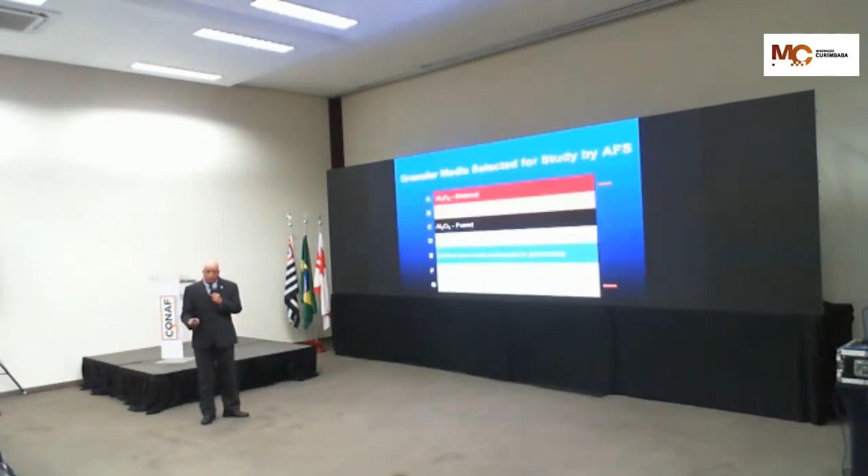I will start by showing you some data relative to funded research programs by the AFS that started prior to the pandemic period. The granular media studied by the AFS are listed here A through G. A would be an example of a granular media that was sintered, and so too is B, neither of which is CastBall. None of the materials C, D, E are Castballs either - these materials are either natural or fused. A natural bauxite material was studied by the AFS, and one of their workhorse silica sands was used as the control in the experiment.

Here we are showing you the composition of these materials, the sintered materials. The main point I want to make here is these would be medium to low corundum producing materials as a compound, and the others have relatively low levels. The other descriptions, chemically and physically, for the sands are depicted on the screen. I am going to point out some of the pertinent facts.

The AFS tried to maintain an AFS grain fineness number around 50 to 60 for comparative analysis. Some of the natural materials we couldn't get within those ranges, but this is what an AFS steering committee of experts required us to use at Western Michigan University in our studies.

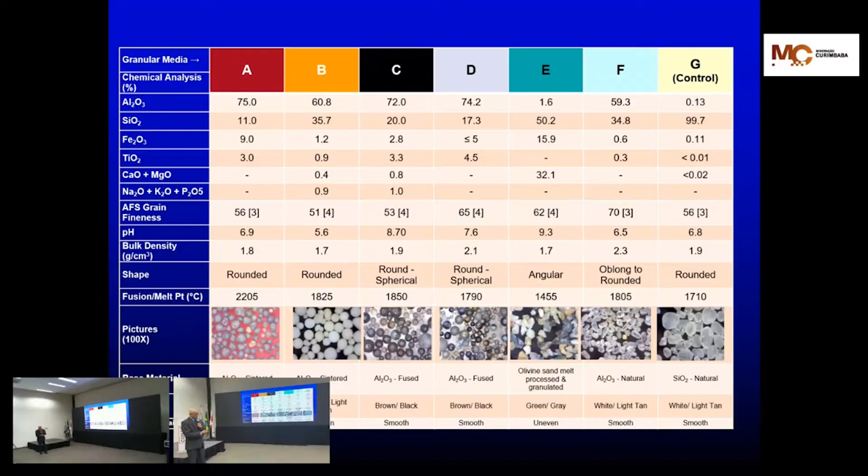Here we are showing you the pH values on the system relative to neutral, and then bulk densities of the aggregates, the shapes which are also pictured under 100 times magnification. Those are the important facts about the materials that were studied previously. Again, Castballs was not considered at that time for this study.

So a new AFS casting surface quality standard was needed. Why I'm saying this is because when we measure the grain fineness at AFS, that just gives us the average particle size. The number of screens is a distribution in foundry work that continuously changes as the sand is depreciated and predominantly gets finer. But when that sand gets finer and finer, it ultimately increases surface area, and surface area, in my opinion, is a major factor driving strength.

But strength is only one property of a granular material that we need in metal casting. What is metal casting? It's more than mechanics - it's thermal, it's chemical, it's physical. In some cases it is even more. When the metal touches that sand mold or wall, the reactions are thermochemical, thermomechanical, thermophysical. For these reasons, we needed to study surface area as well as new technologies that could get us the related properties in the sand.

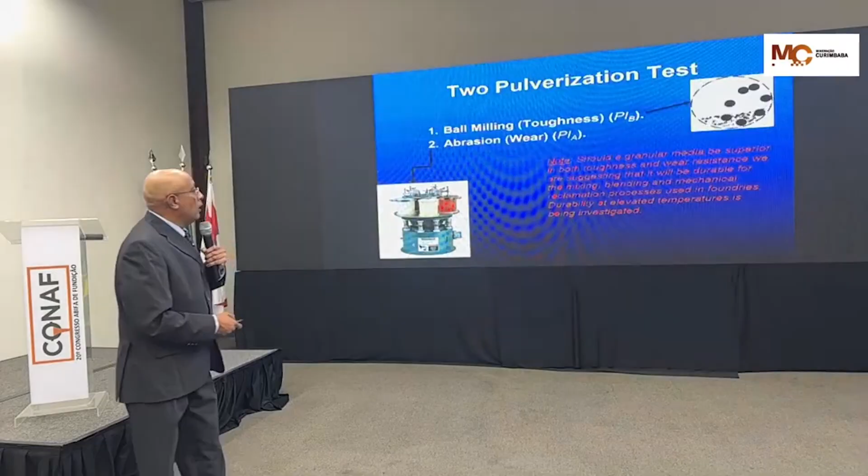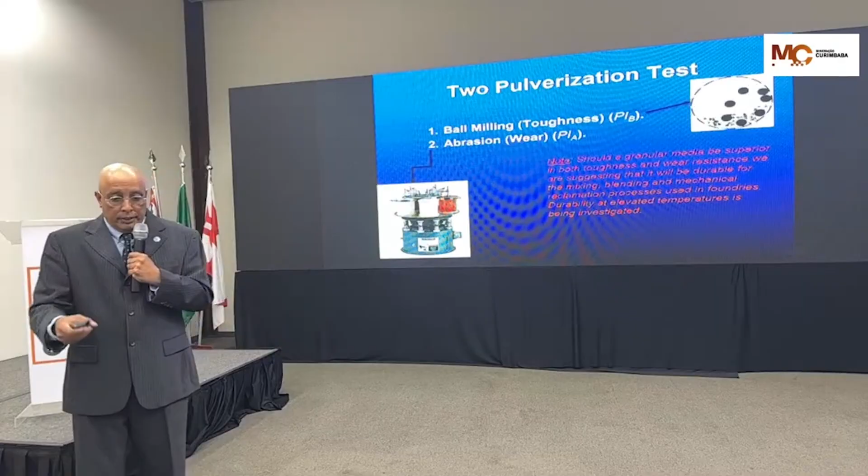So when we study materials, we have developed at the AFS a pulverizing as well as an abrasive wear test for foundry sands. These particular tests are run at ambient temperatures or room temperatures as well as the elevated temperature test. In the case of this presentation, most of what I will relate to is cast iron temperatures. So we would test these materials.

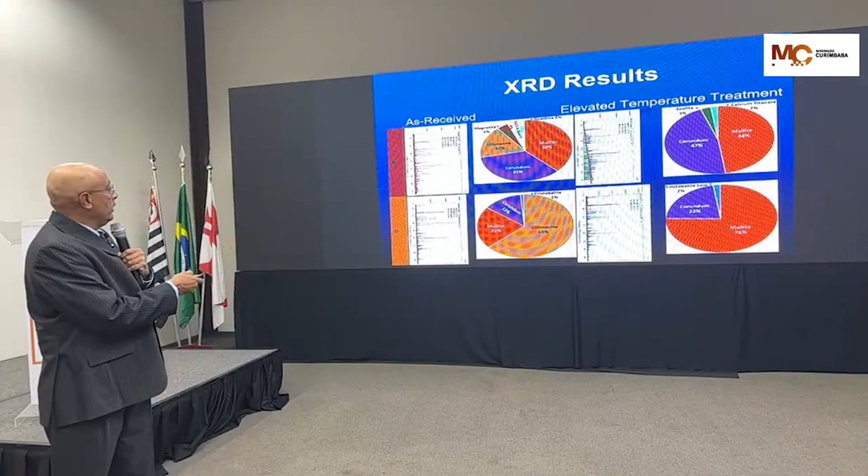In impact and abrasion, furthermore, we have studied the changes in these ceramic sands. For example, on this slide, I'm showing you one of the sintered sands that I pointed out before compared to another sintered sand. Again, when we look at ambient results from XRD, we see the level of corundum is still reasonably low. It increases or changes after elevated temperature testing.

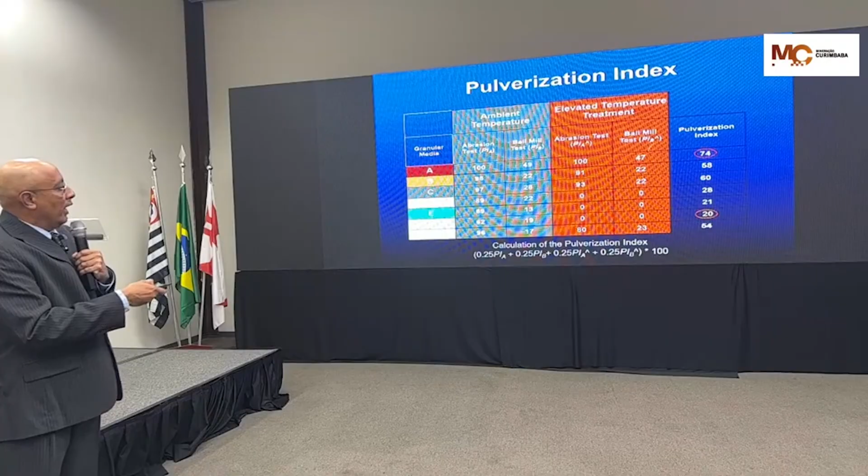Still, these levels, even after reclamation, thermal reclamation, cannot increase significantly. This is just some data relative to the pulverizing index that we run at room temperature and elevated temperature. As you see, the materials with the higher levels of corundum perform better. The higher the number in pulverization index means less breakdown in impact and wear. But what if we have a sand that was not a part of that AFS study that contains even higher levels of corundum?

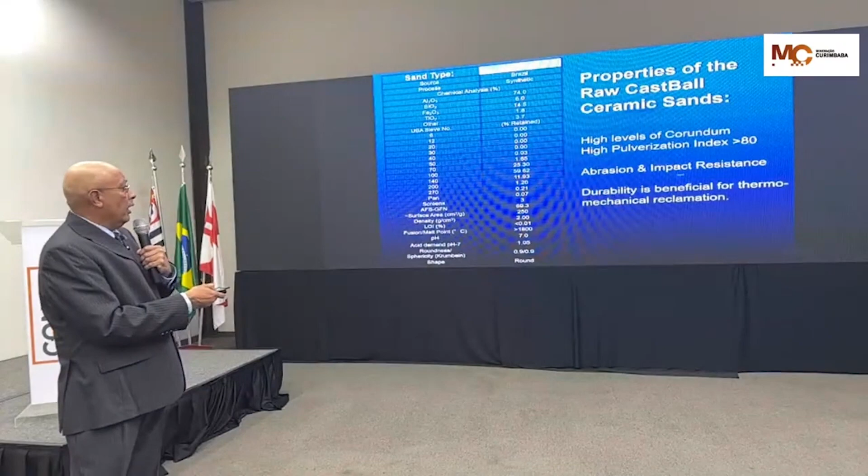Okay, so this particular slide shows where I'll be taking my discussion further. Relative to our work, I am looking at a sand made right here in Brazil, CastBall. The chemical composition that will indicate a material of much higher levels of corundum. I've indicated our measurements indicated greater than 80%. This material is more abrasion and impact resistant, and the durability is beneficial to the thermomechanical reclamation of such.

For our studies, we looked primarily at an average grain fineness number, about 70, and it shows the surface area, the bulk density, the fusion levels, the neutral pH, and the sphericity and roundness that are very high for this sand that we will compare to the same silica sand that I showed you previously.

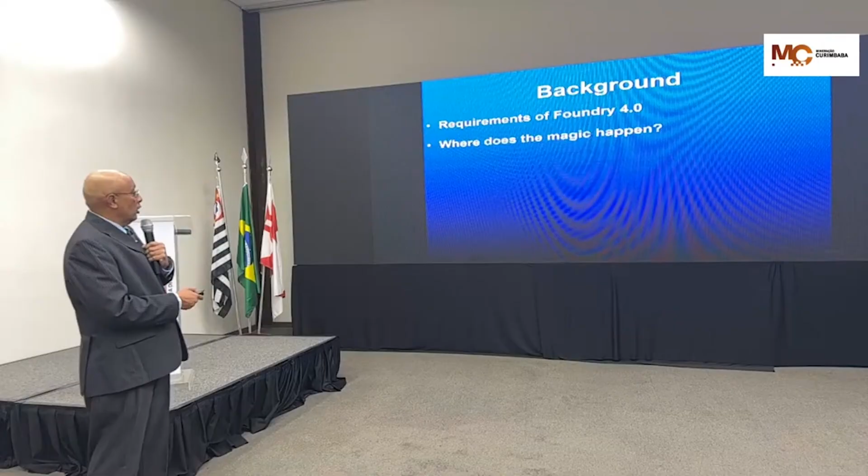So, some background. The requirements for these precision sand systems for chemically bonded sands, and I'll mention their names right now: certainly the 3D printing technologies for additive manufacturing, and then the more conventional systems, the hot box systems such as Shell, the cold box systems, the urethane-based systems, and the no-bake systems, typically for our larger chemically bonded sand casting processes. Okay? But they today are running in some cases without the touch of human hands. But where does the magic in the casting process happen?

For us at the AFS, we have a research committee called the MMIR, which stands for the Mold Metal Reactions Interfacial Committee, and I serve on that committee as a researcher.

And I'm here to tell you, we have seen even fine, smooth grain finishes with deleterious or rough surfaces bearing defects such as veins and penetrations that we literally have to spend a lot of money and time, time is money, in the finishing room to remove. So we have to study where that magic happens.

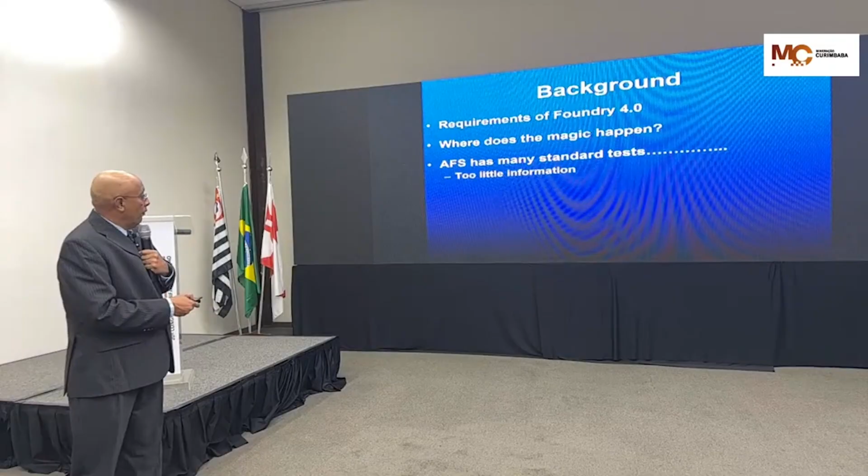The AFS has many tests currently on the books, but only a few of them are for chemically bonded sand systems. So we get very little information from the chemically bonded sand standards. A performance predicting measure for precision sand systems is needed. That performance predicting measure is something that I will be describing today. It's a casting trial based on the properties of the chemically bonded sands that we get from the laboratory.

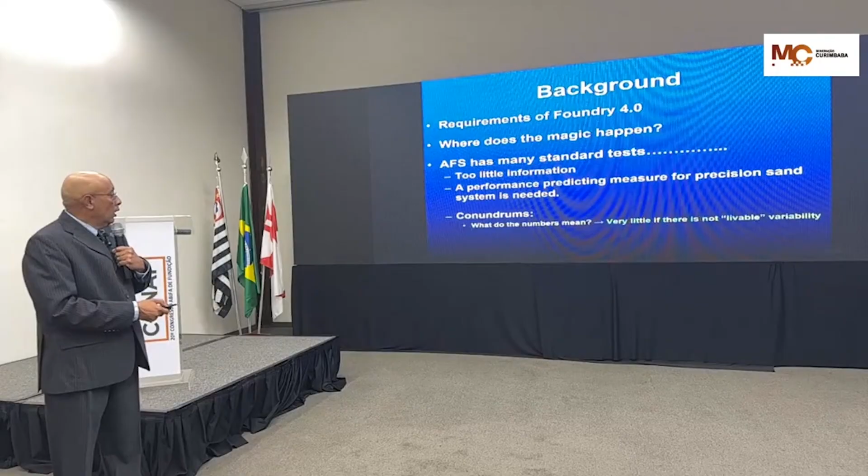What are the conundrums? What are the confusions then that we get with chemically bonded sand processing? What do the numbers mean? It means very little if there is not livable variability. Livable variability is relative, but it still has to be low.

The variability must come only from the process. It cannot come from the sample, it cannot come from time, and it cannot come from our testing. The variability that we have to measure against quality is the variability of our process. And that we have to determine ourselves within the foundry in terms of what is livable for us. Livable means what my customer is willing to accept. That's what it means.

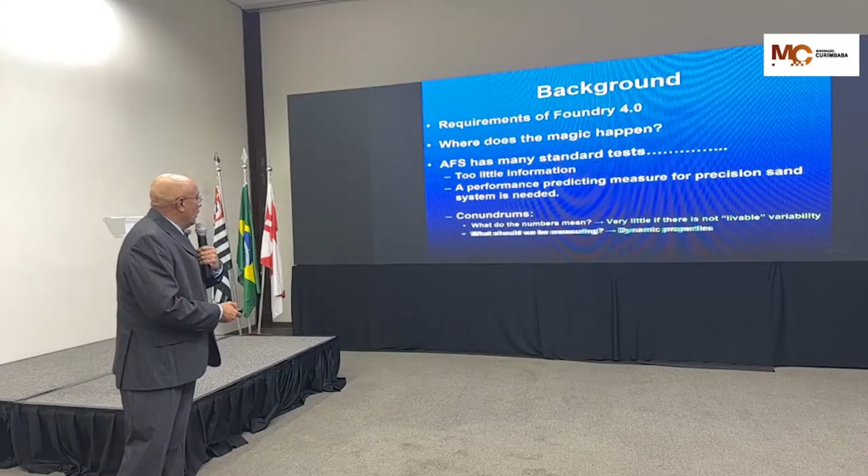Another conundrum is what we should be measuring. I believe these should be dynamic properties. The dynamic properties are properties happening in near real time from the metal casting process that gives us engineering property data that is thermomechanical, thermochemical, physiochemical, etc.

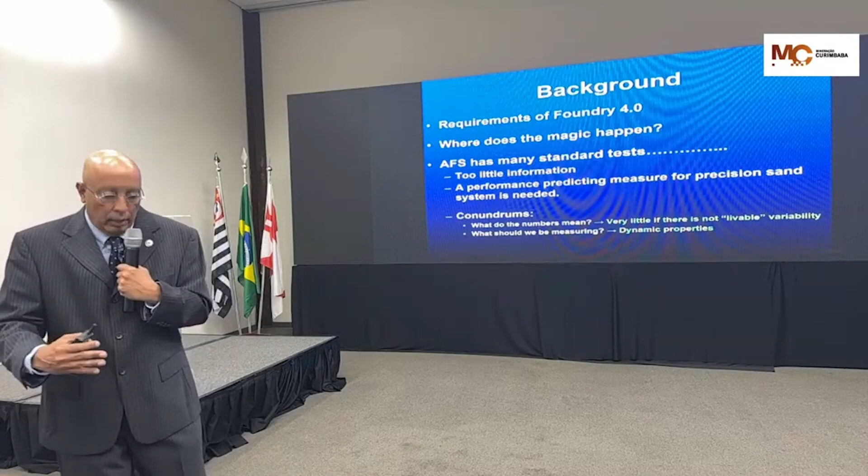When should we measure? Should we be measuring hourly, daily, weekly? I am suggesting we need to be getting this data at line speed. We need to be getting smart data. Smart data is not just digital data. It has to be coming from the process in near real time.

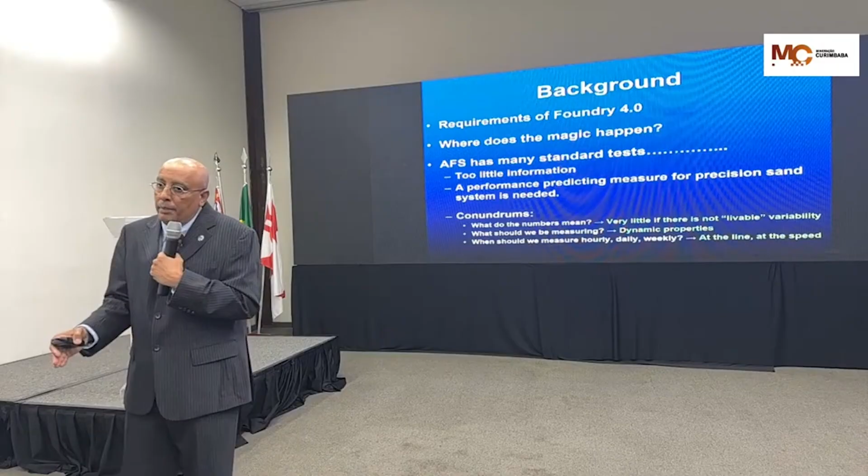We can't use yesterday's data. Yesterday's data about our foundry systems is legacy. It's not going to help us with the changes in our environment, with our materials that are today. And we need to be responsive for these casting defects in the foundry before they leave our foundry to cost us warranty or guarantee complaints.

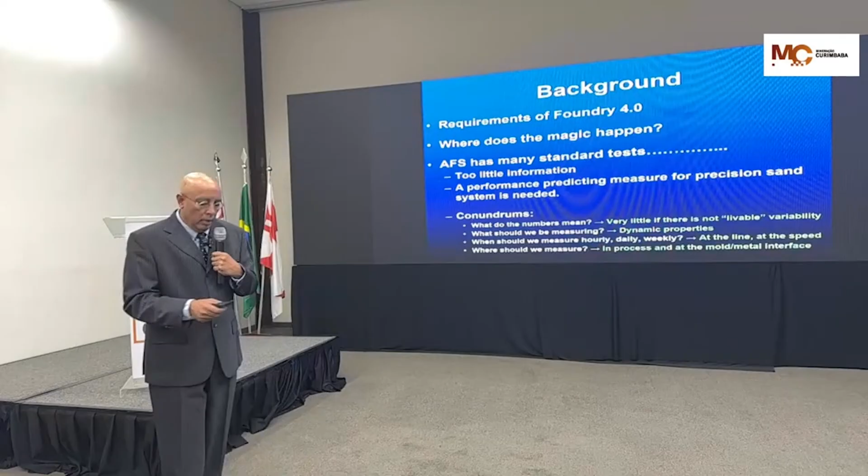Where should we measure? Again, I've mentioned this before, but I'll say it again. In the process at the mold metal interface. Why? Because that's where the magic happens.

The purpose for precision sand testing is a quality process control program that we are looking for in the foundry, something that we need data for that allows us to tell us what the next casting will look like. We want to predict when a defect or shift might happen, and we need the data to do so.

Casting defects: the characteristics of the chemically bonded sands are altered from what we produce at room temperature to what sees elevated temperatures at the mold metal interface.

Certainly, the quest for consistency. What the quest for consistency is, simply the idea of us producing the same level of output with the same center, the same amount of livable variability, and the same distribution for that process. 8 a.m. when we start work, 9 a.m., 10 a.m., and so on and so forth throughout the day.

Technology and sustainability is crucial to our world. We live in a green country. You live in a green country here in Brazil. We want to keep it that way. And certainly we want the foundry industry as well. So it has to find a symbiotic relationship.

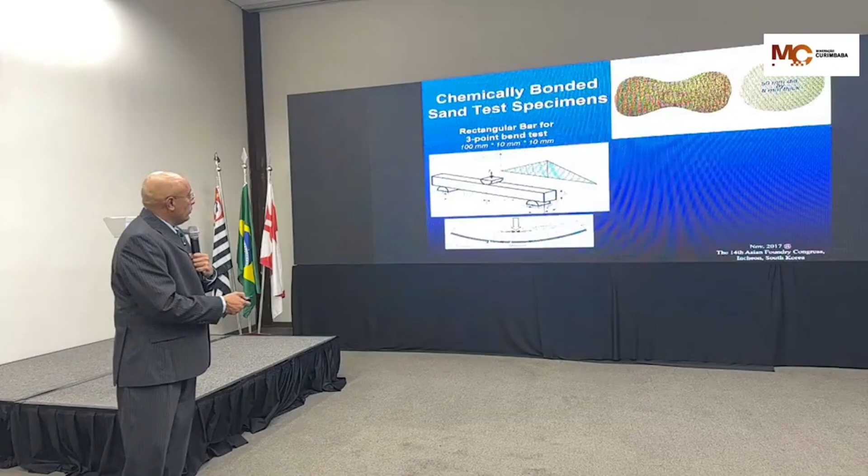So I am saying no to the dog bone. We don't eat dog bones. Cookies are better. And I'm saying no to the Kit Kat bar. It's not that they are bad specimens, but with these specimen types, we only get mechanical properties. What I want to show you is that with the cookie, which is a simple shape, we cannot reinvent the wheel. We don't reinvent the wheel. We get...

...shape factor advantage. If I put heat at the bullseye, right at the center of the cookie, I know where that heat will go, radially or axially, in that cookie. But if I have a sexy shape like the dog bone and I put heat or stress on that, it is non-uniform. Similarly with the Kit Kat bar. But the most important point is that in the complex shape, we could have stresses due to the ejection of the specimen from the tooling. That shows up as stress on the casting. Similarly with heat transfer, as I mentioned, with the simple geometry we can model that more effectively to get the appropriate data.

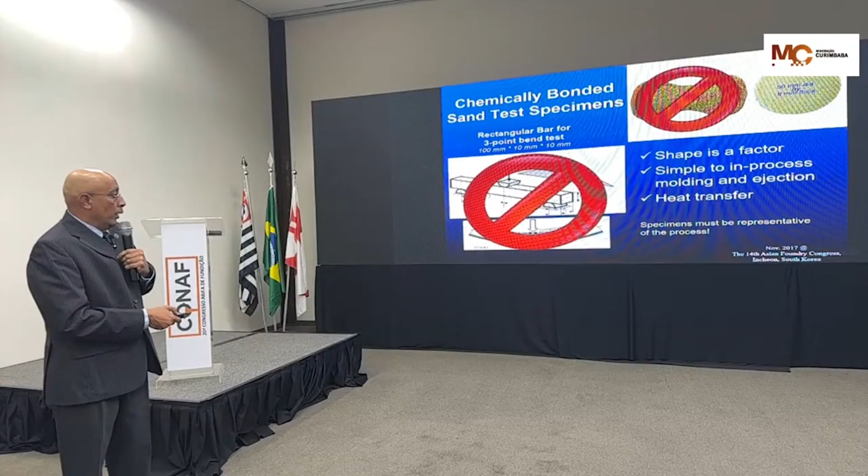There was a paper that I did some years ago at the Asian Foundry Congress in Incheon, South Korea, and that technical paper shows why there is more consistency, or in a simple sense, less variability for chemically bonded sands using data from the cookie. Today I will show you the tests that we use to gather data from cookies. Again, the specimens must be representative, meaning it has to come from the process, and if we can, let's get that data today when we are making castings in the process.

So for the shell process, shell is a hot box process. I am going to have a back. This will be a video that shows you how we use the shell hot box process to make a cookie.

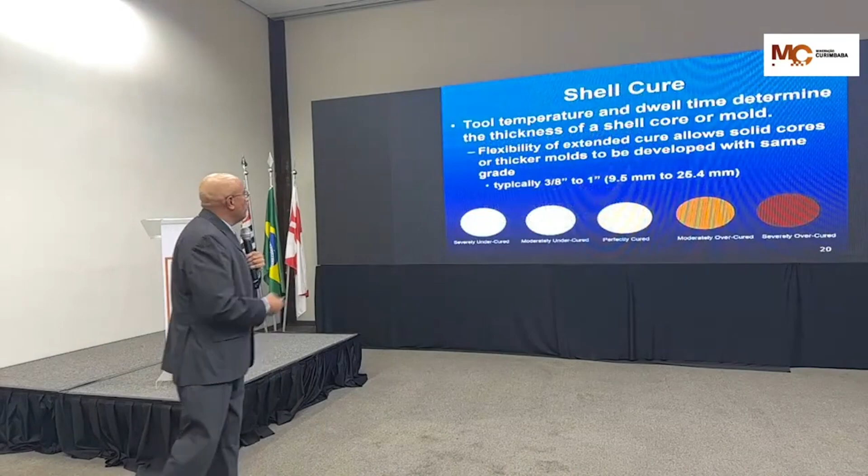One of the major problems with shell is that it needs visual acuity. We have to use our eyes. When we cure the shell sand, this depiction is saying my cookie is severely undercured.

This cookie is severely overcured. Maybe in the undercured cookie, it may lead to gas-related problems. In the overcured cookie, it is a friable issue, and this khaki tan color is perfectly cured. Now, that's what I might be seeing with my eyes. If you have better than 20/20 vision, you might be seeing a different color. We know we don't always see that the same.

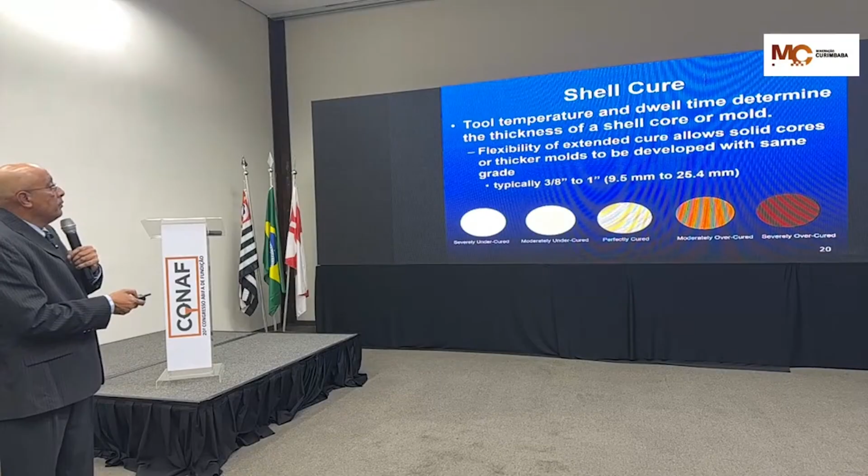But now, what if that sand is an opaque sand? We do not know when we are cured. So this is why we need qualification techniques around this chemically bonded sand process, and we'll show you how we establish the optimal conditions for this process and cure.

Next process is the cold box process, and this is showing you some tooling. This is a 3-piece tooling, but it can be more. We have to vent this tool around the parting line, and then some simulation for blowing the cold box system.

We can predict the density from simulation and look at the blow pressures through gassing those cores, and then the curing and curing front progressions as we purge the catalyzing gases through this system.

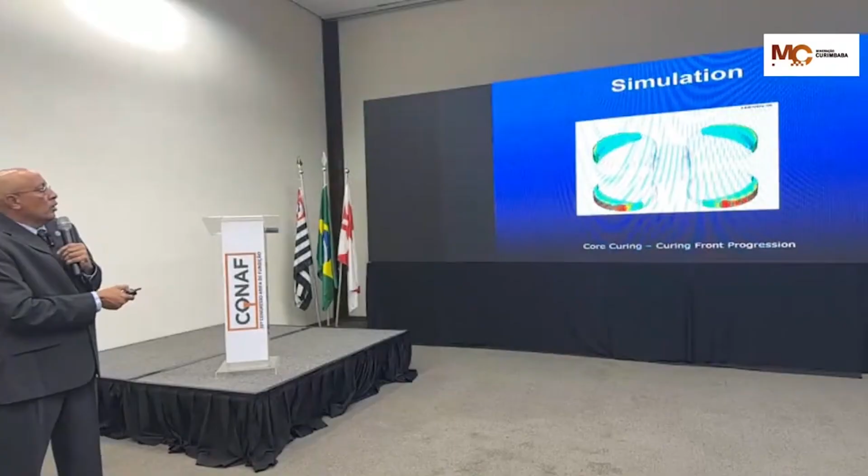Ultimately, we will produce our cookie cores. This would be an example of such, and how we make the specimen tree on the phenolic urethane cold box specimen and tooling. However, there are many foundry customers in the US or other places that have made their own tooling. This is a video.

No, back. Video. Yeah.

This will show just a simple tool that they are producing the cold box specimens in that process.

Okay, and you see. Next. Next.

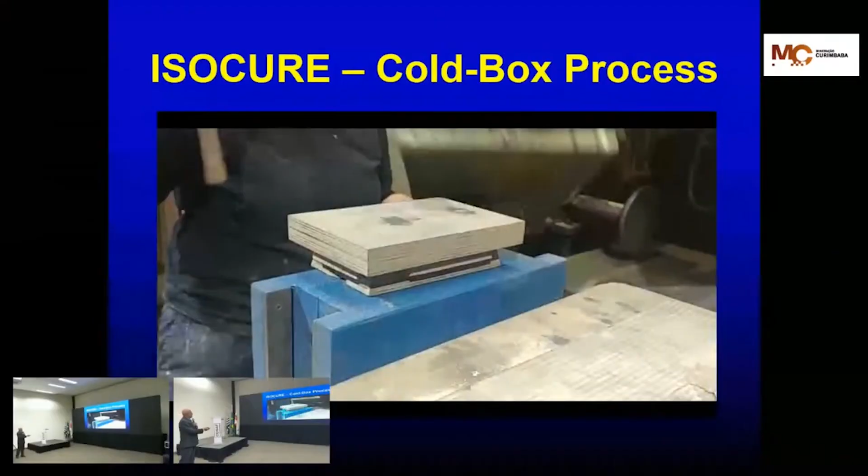But ultimately, whatever the process, hot box, cold box, no bake, we can also try blends in the system. Here is a system with 100% silica sand. Here is maybe 100% chromite. Here is 50-50. Here is 80% silica sand, 20% chromite. Here is 80% chromite, 20% silica, and you can see 40-60, 60-40, any blend you want to try.

For heat transfer purposes, what is the benefit, or maybe you want to consider reducing the cost of your aggregate. We can try that.

With 3D printing technologies, I showed yesterday in a presentation, we have a model, and that model is a dodecahedron. It allows us to produce 13 specimens, 12 of them on the faces of the dodecahedron, and one that we randomly print in the center of the model.

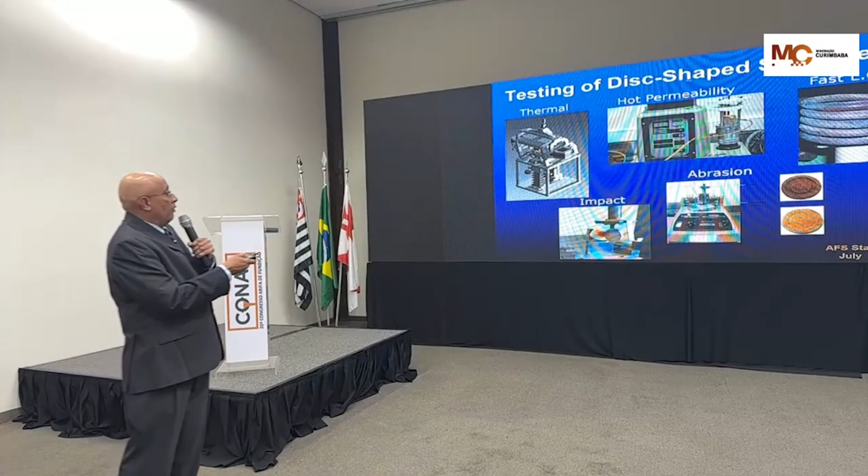The reason we run the permeability test hot is because at ambient, the permeability is only telling us how fine or coarse our sand grains are. But when the metal meets the mold, or the heat touches the cookie, we now see either a condensation layer or a gelatinized layer blocking the interstitials of the sand grain, which will reduce the venting characteristics, or the permeability, of the sand.

We have 5-minute techniques, meaning in 5 minutes we can get the total organics, the volatile chemicals, as well as the moisture measured in your specimens, and characterize the impact strength of the cookie at room temperature. This particular test can tell us the strength of our mold and cores.

Why we look at impact for toughness is because in shakeout, we need impact energy, and the impact energy after the retained strength will give us the amount of joules required for shakeout if needed for that mold or core.

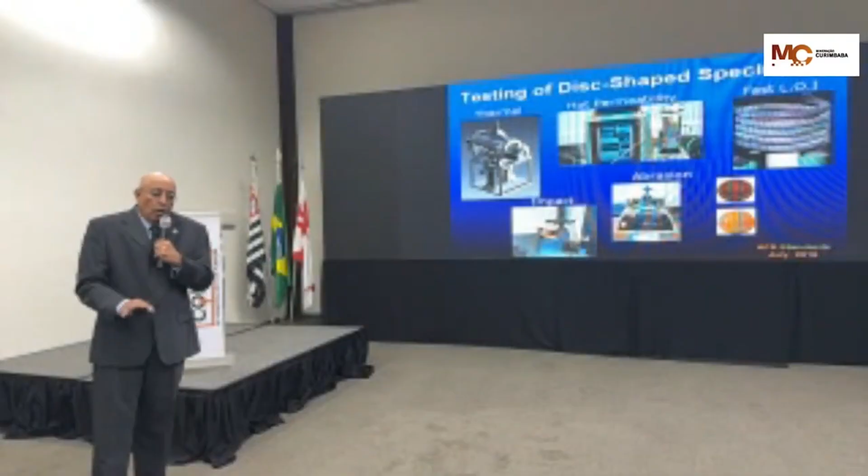The abrasion test represents the friable losses, or the level of cure on the sand. It is indicative of an operator rubbing his or her hands on the sand mold. And if there are erosive losses, we know where that sand ends up. If the molten metal flows in the mold, it ultimately can end up in the pattern cavity.

Okay, so some more information individually about this testing. The LOI test is the loss on ignition. The AFS test typically takes 3 hours, 2 hours at 1000 degrees C, and then we have to cool that specimen off before we can take the weight again. The thermogravimetric measurement indicates the LOI.

That is too long. If we are waiting 3 hours for that data, and there is a hydraulic line leak on our sand or so, and the organics go up in our sand, we are making casting defects as fast as we are making molds.

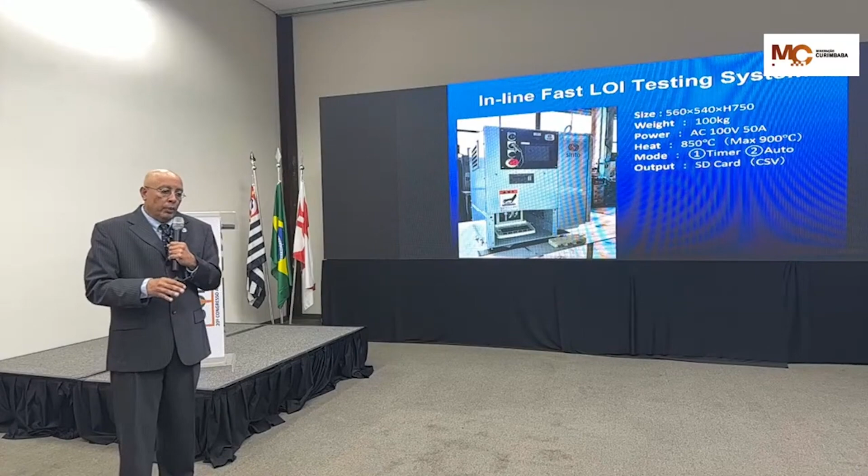So the technologies developed at Western, again our major funding agency, as you see here, would be Sinto. They have automated this technology, and they have this equipment available in Japan for fast LOI testing. More recently, just this year at Western Michigan University, we have modified this technology so that we can measure the organic compounds as well as moisture all within the same time period of 5 minutes.

I will forego the explanation of the computer data acquisition, but what is happening is we ramp up to the AFS standard test temperature and we look for that data to flatline before we change and check the mass again, then ramp up the temperature to measure the VOCs and then the LOI.

So we check moisture. The moisture indicates dry sand. We move and measure the VOCs, and then we measure the total organics of the sand system. Again, today this can be achieved in 5 minutes as an AFS standard.

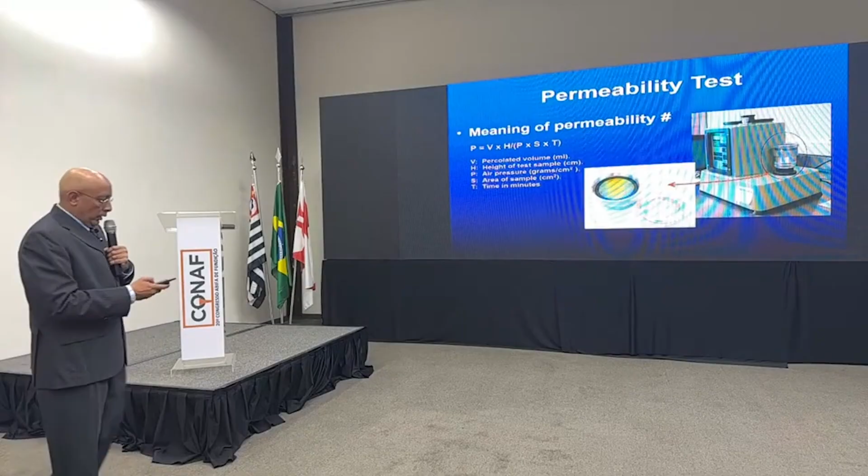The permeability is a long and drawn out formula that the AFS gives a number for, a complex measurement that literally tells us very little. It only tells us how fine or coarse the sand would be, because this test standard runs at ambient. It forces 2000 centimeter cube of air through the specimen, and the time it ultimately takes for that to happen is the permeability number.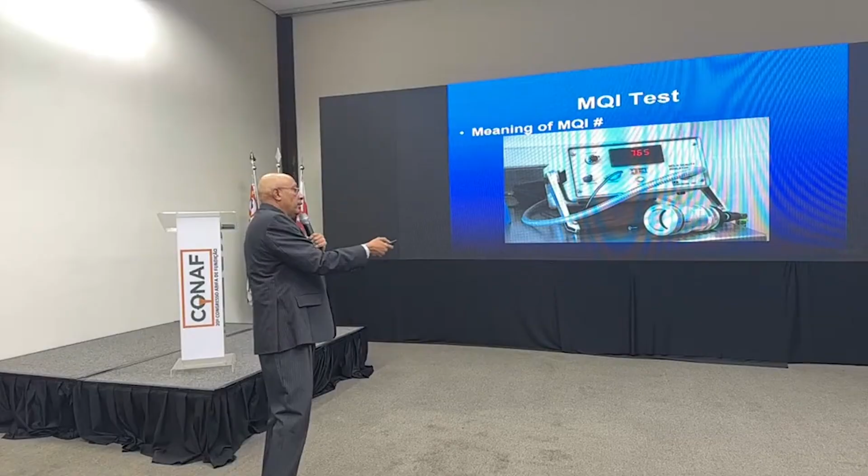I will show in a video how we run this test using the MQI modified. Can we play the video? It's okay, we can play this one. Go ahead, it's the same idea.

So the specimen is gasketed and placed in a tube. This is the laboratory test. We are working to automate this technology as well. Again, we are looking at what 2000 centimeter cube of air going through that cookie will generate for the permeability number according to AFS.

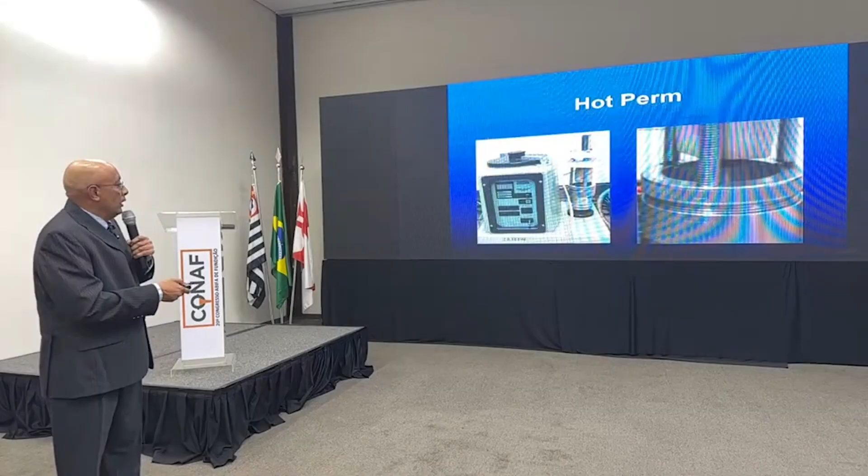But then we will use the MQI test, which is a mold quality index standard, based on a pressure of air and the resistance to that pressure from traveling through the specimen, giving us a direct number. We have collected this data to find an inverse relationship between permeability and the MQI values. This will allow us to measure more important characteristics of the sand that we could use as property data, such as Darcy's numbers. But what is more important about the permeability is that we can do it hot. With hot permeability, we get an indication of how the venting characteristics drop at the mold metal interface.

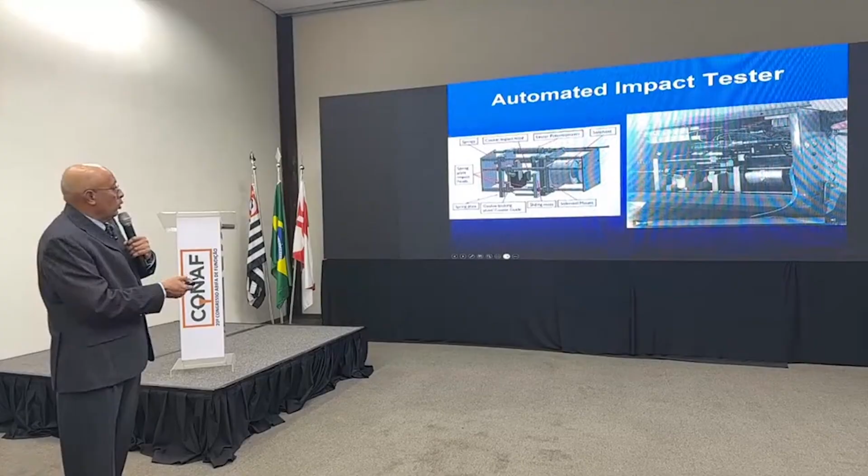Okay, we have automated this test as well, so this could be inline. This is a video, but I'm going to skip this over for the sake of time, just to move us along. This is the abrasion test.

This is the one that tells us about the level of cure in the sand or the friability of the chemical binder system. It's a ceramic ball that is 4 millimeters rotating against the specimen at a predetermined load for 20 rotations. We look at either the depth of penetration or the losses of sand as a percent. That is the function of the friable losses from abrasion. It's representing the molten metal flowing past the chemically bonded sand.

So from these tests, we get data, but the preeminent test for thermomechanical testing is the thermal distortion test. The expansion, contraction, and degradation experienced by the mold or core under the extreme heat and liquid pressure of the molten metal. What this means is that in our casting process, certainly we as foundry people, we like to think of temperature. But it's not just temperature, temperature, temperature.

Equally stressing in the casting process is the liquid metal pressure that is measured by rho GH, and as it presses against the mold wall, it is the opportunity to cause deleterious conditions such as veining or crack propagations.

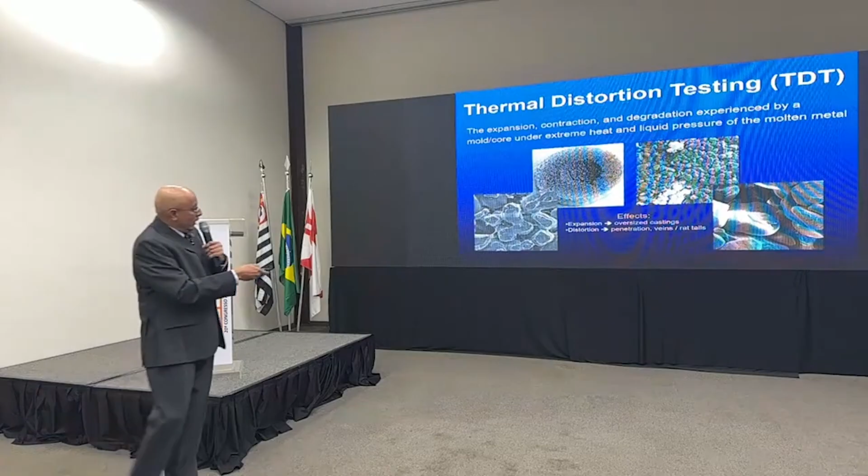If we wet that with molten metal, that particular expansion could cause oversizing of the casting, but the distortion issues related to that crack can be penetration, vein, rat tail defect in the casting.

So this is what a rat tail would look like, a fin. That's what we may need to grind off in the finishing room, or do some grinding or machining on these surfaces to improve the surface quality.

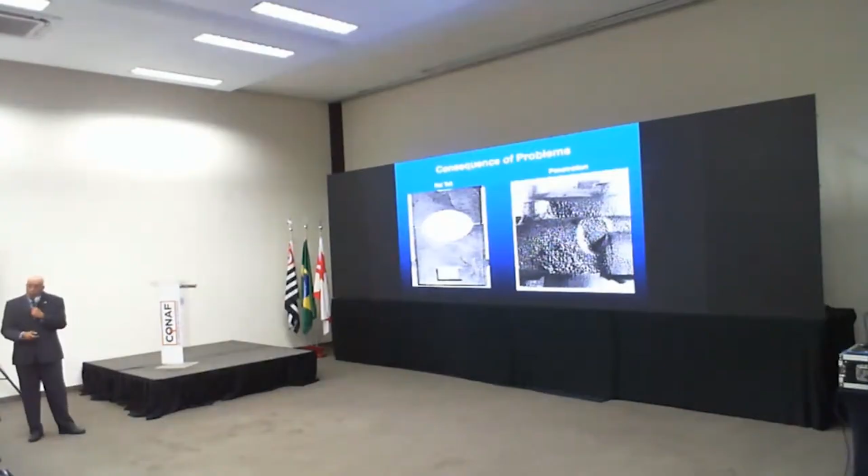So how the thermal distortion test works is that we can support the specimens circumferentially 1 millimeter around the circumference, and that periphery is held on a gimbal to self-align and self-center the cookie against the hot surface that is 20 millimeters in diameter.

The test duration is dictated through simulation analysis of the casting. Typically, high head pressure castings take a longer time to solidify, but that is important in this process.

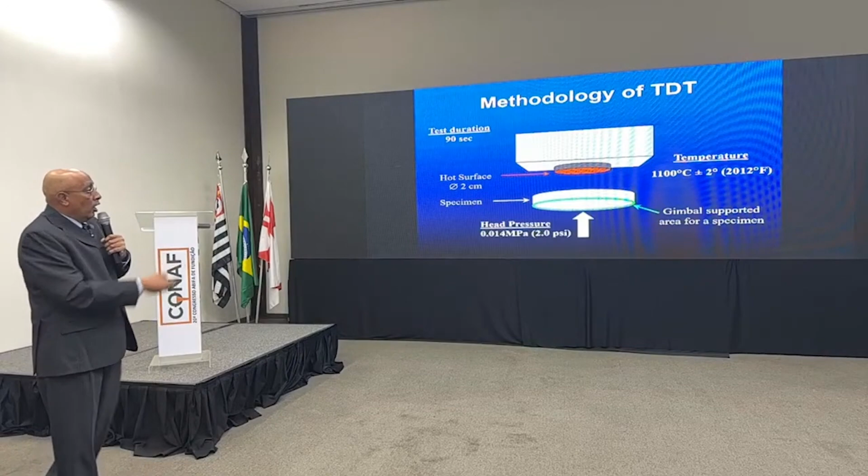Our test temperatures can go up to 1450 degrees C if we are representing iron. In this case, we were looking at a copper-based alloy, so the test conditions were closer to 1100 degrees C, or if it was an aluminum alloy, we would look at head pressure against an aluminum temperature like 700 to 760 degrees C. This is how our mechanics or thermomechanics would relate.

To show you this in a cross-sectional view, the neutral axis is not what is important, it's the rotational axis of where the cookie hot surface interface would represent the mold-metal interface in casting, and we're delivering the head pressure against that.

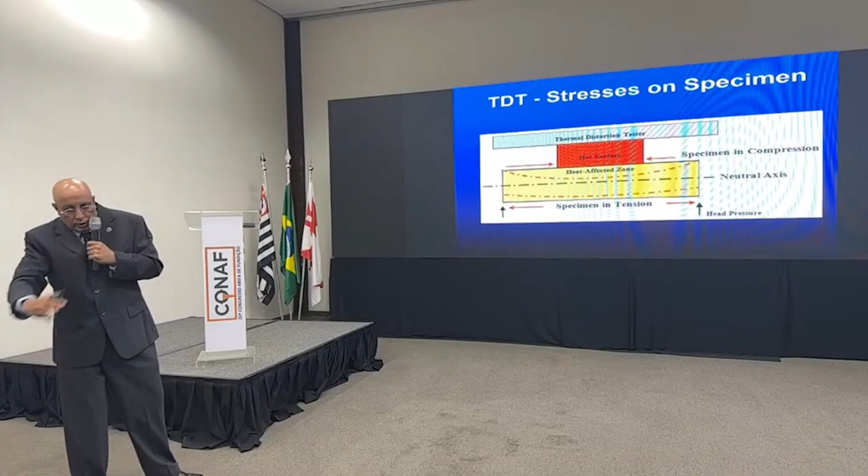So if the cookie is moving away from the hot surface, that would represent pure expansion, a curve moving up. If the cookie sags around the hot surface, it would result in plastic deformation, up and then downward movement.

So there's a video here to show you. The cookie is loaded on a gimbal and it's brought in direct symmetrical contact to the hot surface, that is the alloy temperature superheat, and we are tracking the temperature on the back side and at the hot surface. The cookie is nominally 50 millimeters in diameter, so we could track in real time its movement radially as well as axially. What we are trying to do is get 3D data for temperature and dimension of the cookie in this test.

The cookie does remain intact so that we could evidence additional data through observations using a macroscope, a 3D macroscope, to get surface roughness data, volumetric change data, and loss data relative to sand.

This is what the specimen will look like before the test. This is the heat affected zone, the HAZ, where you literally are burning out the binder systems. When that binder system is blown away, you could see where at one time there would be a vein or crack in the system, and that hairline crack on the backside.

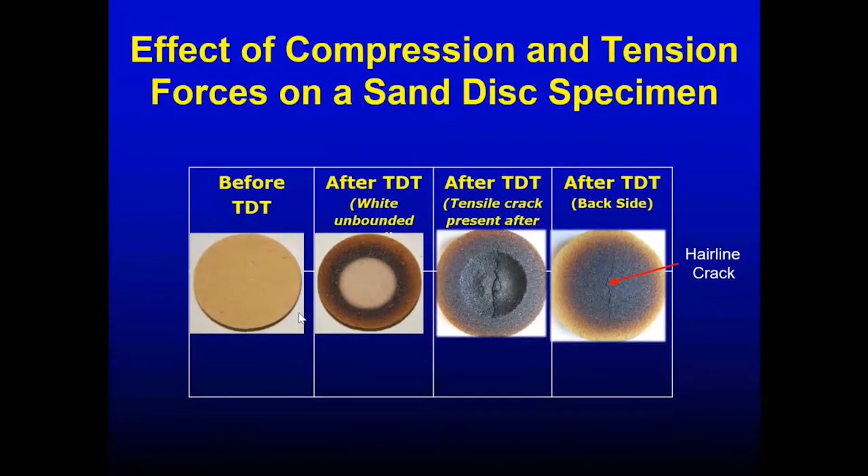That we could indicate, and we know when that's happening. How do we know? We have data from a thermal distortion curve. Here I'm showing you, for example, 4 different sand binder systems. The sand is the same size and distribution in all cases. It's the same sand, but we're using a shell hot box system, a urethane cold box system, a furan system.

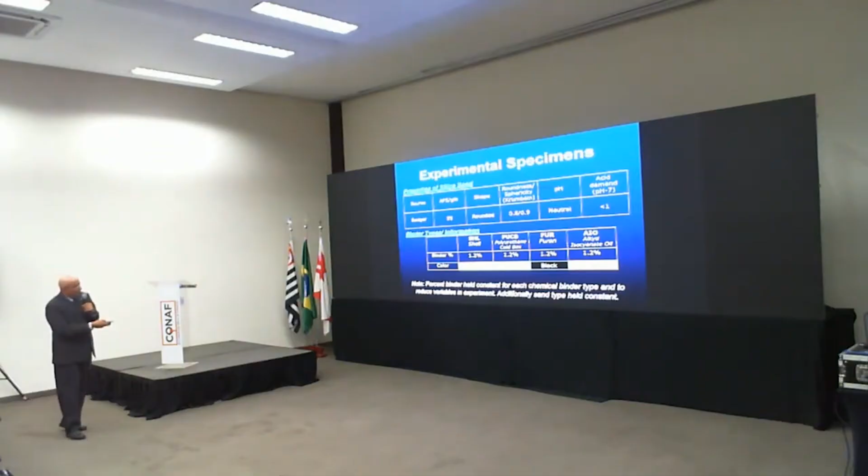Similar to what is being used in 3D printing, and an alkyd isocyanate oil that would be more common in no-bake systems. And the percent binder is held constant for each. The only reason we're keeping the binder system constant here is so that we do not indict any chemistry.

And what we see from that control experiment about the origin, the vertical axis shows the displacement or distortion, and this is time as a function of temperature. So we are testing at a steady state, and we are looking where then will that casting solidify. We don't want too much movement, nor do we want cracking.

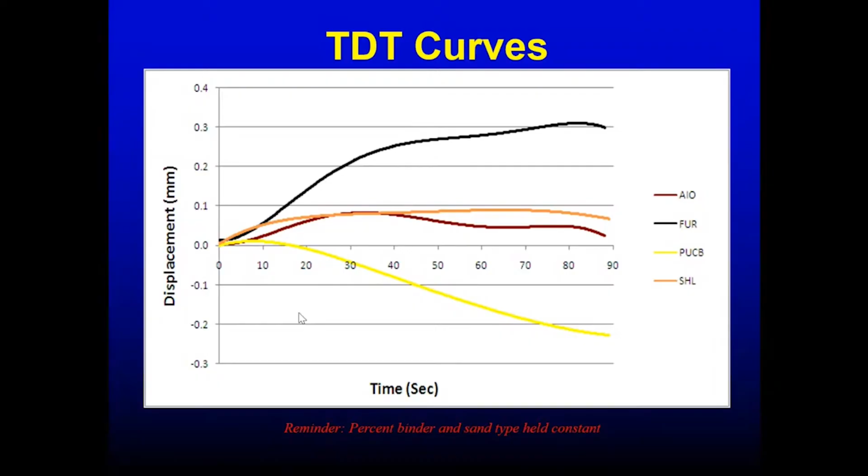But what we see is that the thermal distortion test can distinguish between the different systems because of a thermomechanical signature relative to a percent binder being held constant, as well as the sand. So we know that the issue of distortion is more a cause of the chemistry rather than anything else. And if there is a crack propagation during the test, it is indicated by an inflection point.

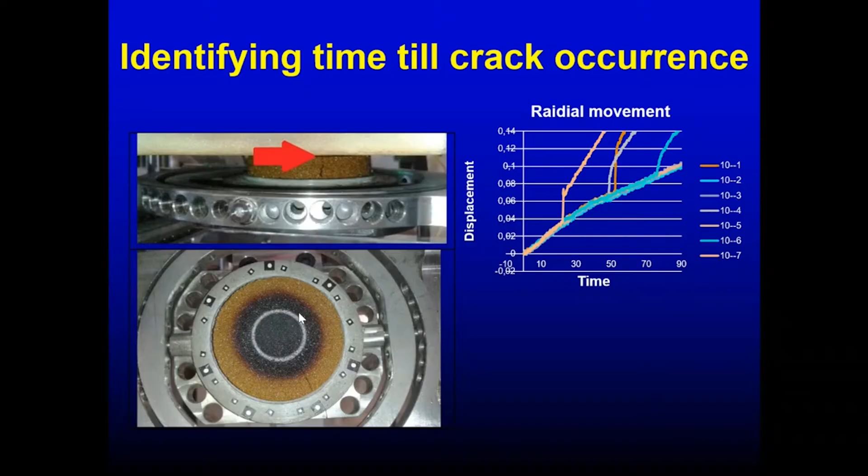So we know how long it takes for that crack to develop. If the sand binder system cracks and there is liquidus in the metal, that's where we get a vein, that's where we could get penetration. But if the crack occurs much later in the test and the iron has skinned over or solidified, then we don't have to worry. That crack will help us shake out.

So we have evidence, we measure that crack propagation relative to the heat affected zone, right? Again, there are other additives, as I mentioned, engineered additives that we can place into the recipe.

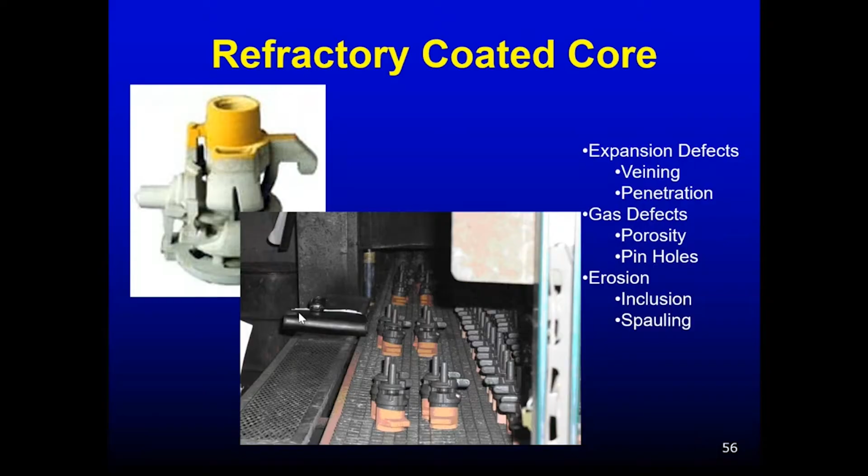Again, the cookie is nothing more than a substrate to allow us to study whether our refractory coatings are insulative, chilling. Are they preventing the defects we want them to prevent, or am I better off using a superior sand binder system?

So these coatings are used to prevent these expansion defects, as I've shown, gas defects, and erosion defects such as inclusion and spalling. Spalling is the idea of heat transfer due to radiation, not convection nor conduction, but radiation that hits the ceiling of the mold, and sand falls away, and then later metal touches that to leave an uneven or rough surface.

That's what a spalling defect is. And I know you know what inclusions are. But here, these defects are rendered on this rotor or this impeller, propeller, that is shown here.

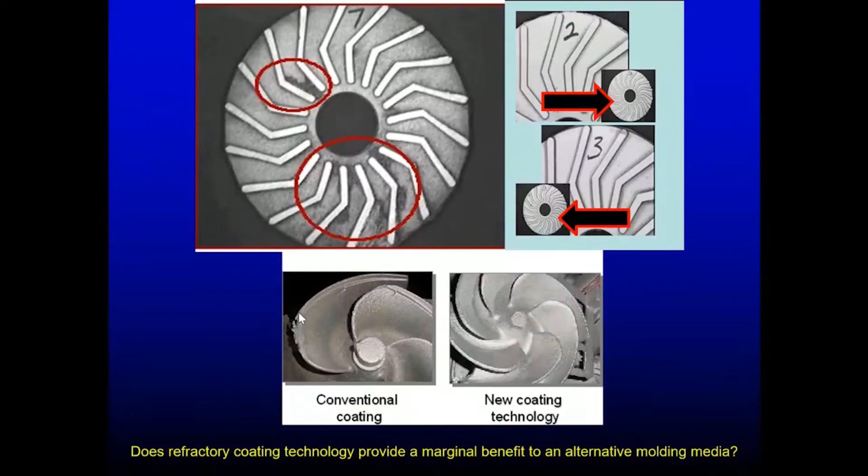And we are looking at, does the refractory coating technology provide a marginal benefit to alternative molding media? That alternative media, if we're using a ceramic sand, a more expensive sand as opposed to silica sand, does that really give us a benefit?

Because to put a coating on, it's like putting a Band-Aid. Does the Band-Aid heal the cut? Or could the cut heal without the need for a Band-Aid? But we have to pay for that Band-Aid, and in this case, we have to dry that coating. It takes time and energy.

So again, we are looking for superior aggregates. This video shows how we would study the coating effects, because the coating effects for rheological characteristics of a coating are a function of dip time.

And every, sorry to be sexist, but there is only men here, every man shakes differently. So in this case, we have to allow that to be controlled, the wetting and the leveling of the refractory coating to control the level and depth of penetration.

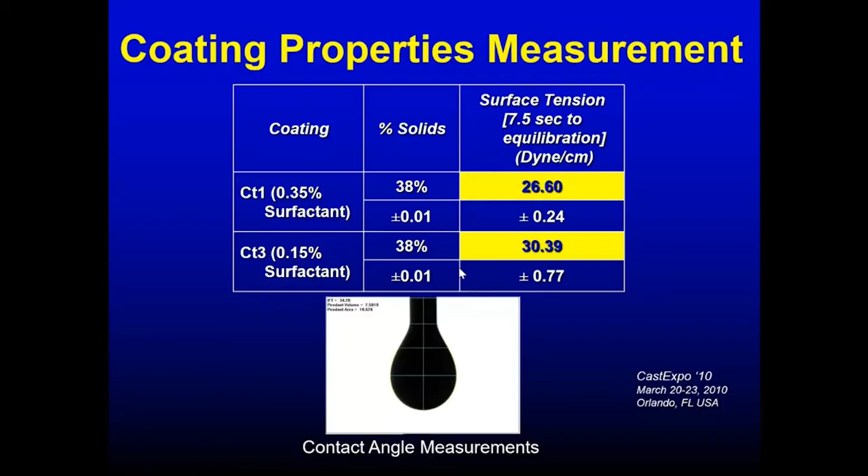We study from the coatings the percent solids, surface tension issues by contact angle measurements. That gives us this data. If you're interested in rheological controls for coatings, there's a paper that I produced and published at the AFS circa 2010.

But we do know if you use the coating the wrong way, the coating changes at 8 a.m., 9 a.m., 10 a.m. You can't blame the sand binder system for that. You have to control your coating separately.

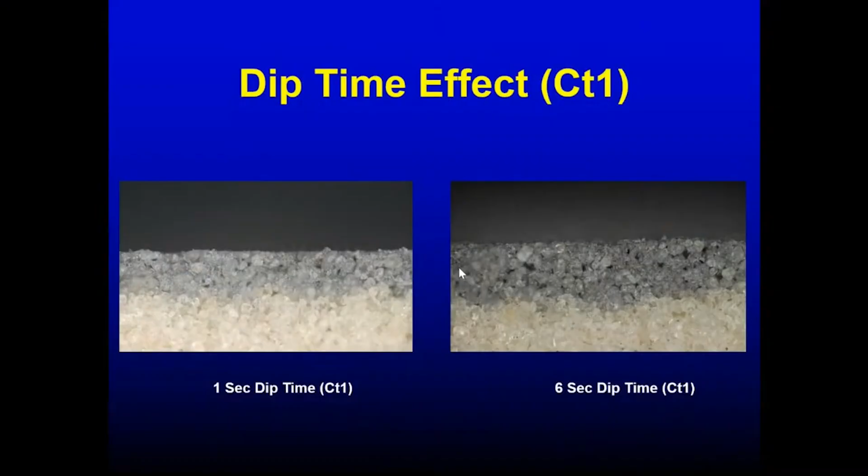So the question is also about the proud coating layer. The proud coating is how much coating is above the nominal level of the cookie, or how much is needed for mechanical interlock in the subsurface penetrated layer. That subsurface penetrated layer and the proud layer can affect the insulative as well as chilling behavior of the refractory coating technology, as well as permeability.

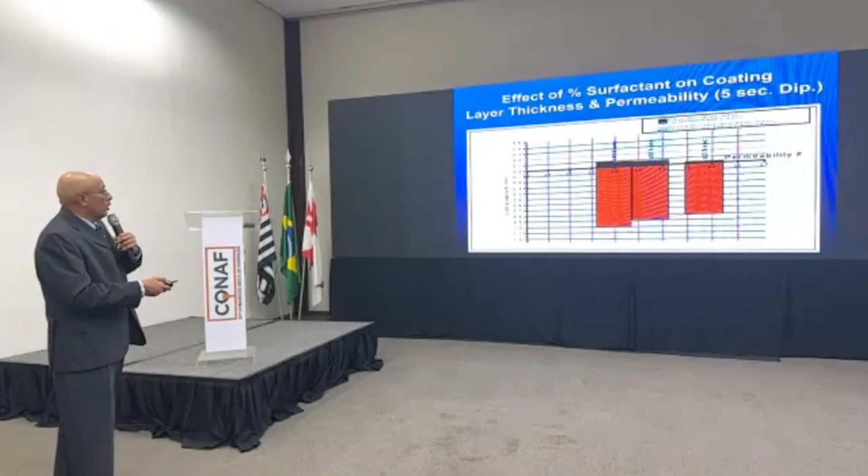So here is the nominal level for coating, no proud layer, everything below the nominal level, and with coating we can see that it affects the permeability. Permeability increases with less coating. We can literally use permeability data to tell us how much coating is there. It is a direct relationship. We have measured that.

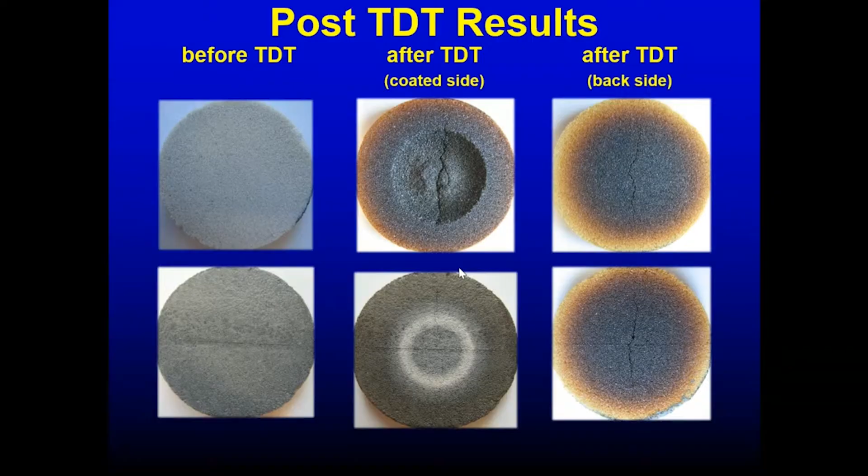So here are specimen cookies, uncoated. These are naked cookies after thermal distortion, and the back side of the specimen. Again, the pyrolysis, this black layer, we can measure how much organics is left. And there is significant amount - 40 to 60% of an organic binder there. It's not gone.

This is with the coating - a micrographite coating. This is the heat affected zone. There is a fine crack. But on the back side, you can see that particular coating is protecting that loss of sand relative to that situation. The video here, please.

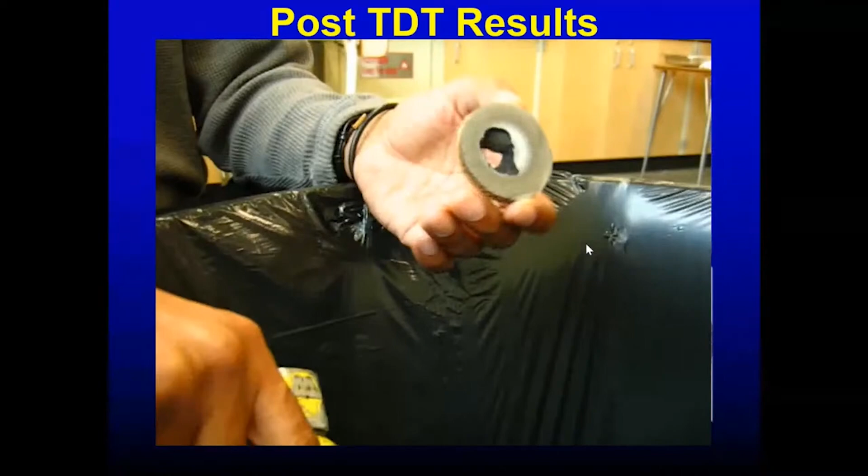So I will use low pressure, 0.003 megapascal, something like that, low pressure, to blow that coating away. And there is where we're showing you those pyrolyzed regions. So when we study the cookie with 38% solids in the coating, you see that it is remaining intact.

So less coating can be more. What is happening here with a significantly proud layer is gas development under this layer of coating that is proud, causing delamination and distortion to that sand binder system at 42% solids.

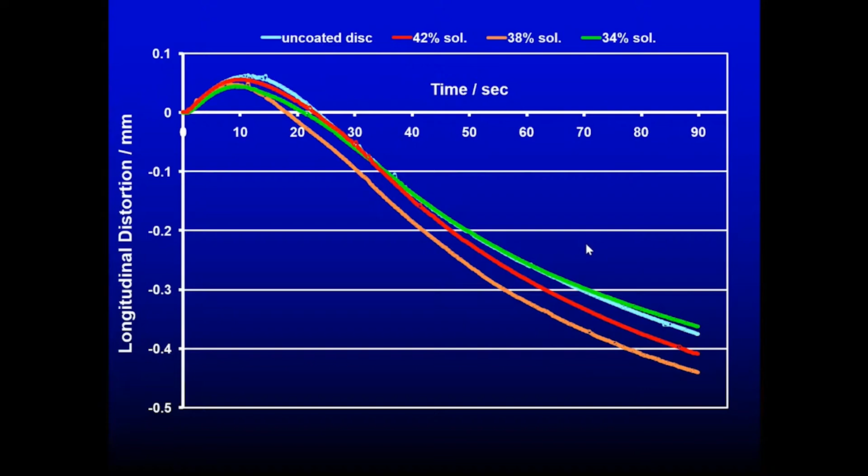So the question is, does the coating work? What we looked at here, again, this is for a specific coating, micrographite - uncoated in blue, 42% solid, a lot of coating, to low coating levels. The coatings, in this case, as a chill coating, are not preventing distortion.

Here is the origin. This is expansion. After 20 seconds, there is plastic movement of the cookie - it starts to move. So we have to engineer the sand binder system with the cookie to prevent that.

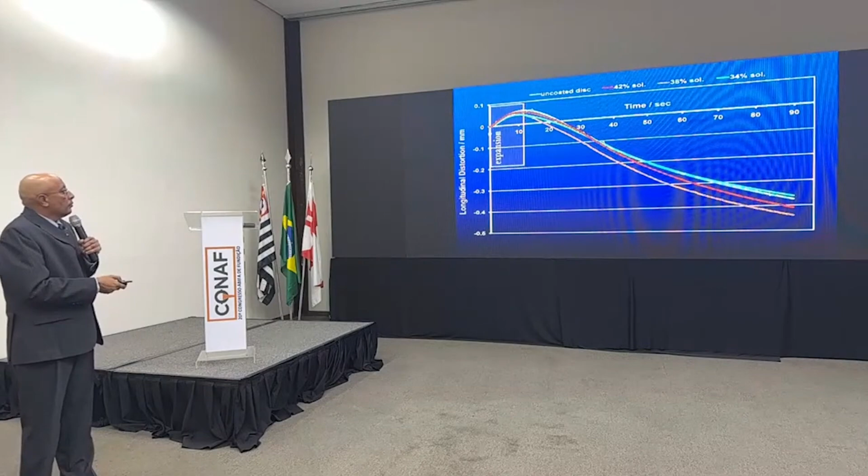With ceramic sands, we have seen, and I've shown yesterday in work, that the ceramic sand materials are thermally stable and they literally hug that origin line. It's expansion and then plastic deformation, and this is how we track the distortion.

But the foundry engineers are never satisfied with laboratory data. All that I've mentioned is property data that we need to feed our simulation models. And now we have developed casting trials.

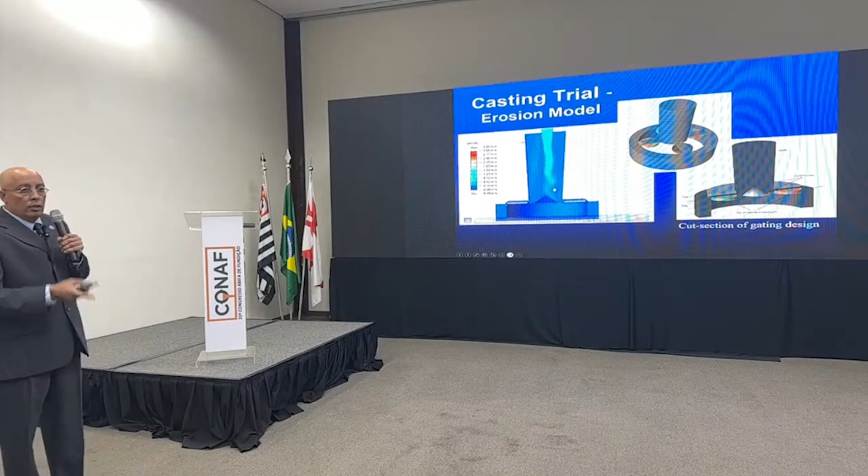Can you play the video on the left? Next, back. Yeah, this one - this is the one that we use for studying erosion. So there are cookies under this head. We deliver that metal at a turbulent fill. We want to achieve half a meter per second, because we have data to show that at that velocity that can cause turbulence, we can have erosive loss. So we have the model to support our erosion loss predictors.

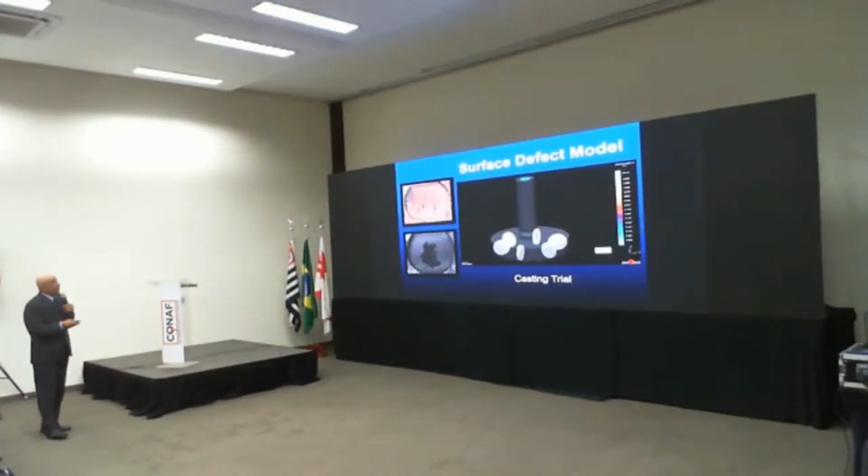Similarly, we can test - play the video - what we call the surface defect model, or better known as the cookie and donut model. This cookie and donut model allows us to put different recipes around the donut and test to see, if we section the interface, if there is a vein, if there is penetration, we could see that against the cookie.

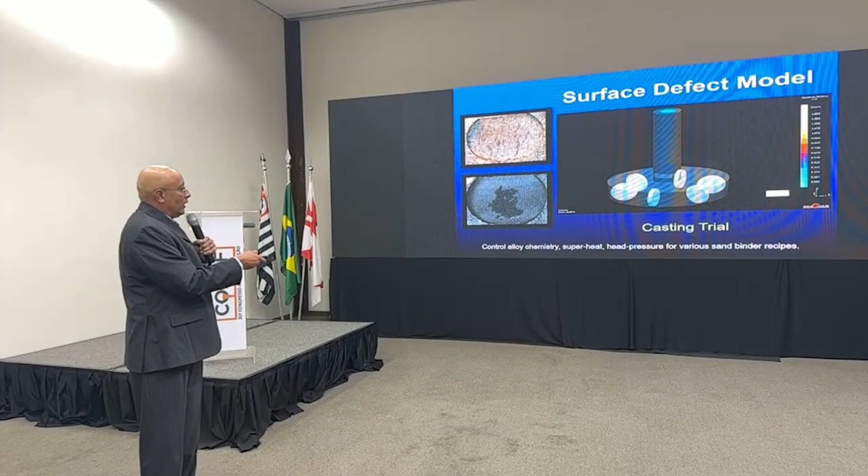Let me just back up here. So we are controlling the chemistry of the alloy. This trial is for a given alloy chemistry, and the superheat temperature - the temperature that we pour from - and the head pressure are controlled. We know what rho GH is for various recipes that we can have: a silica sand, a ceramic sand, a blend, etc., a coated sand, and we study it in the same mold.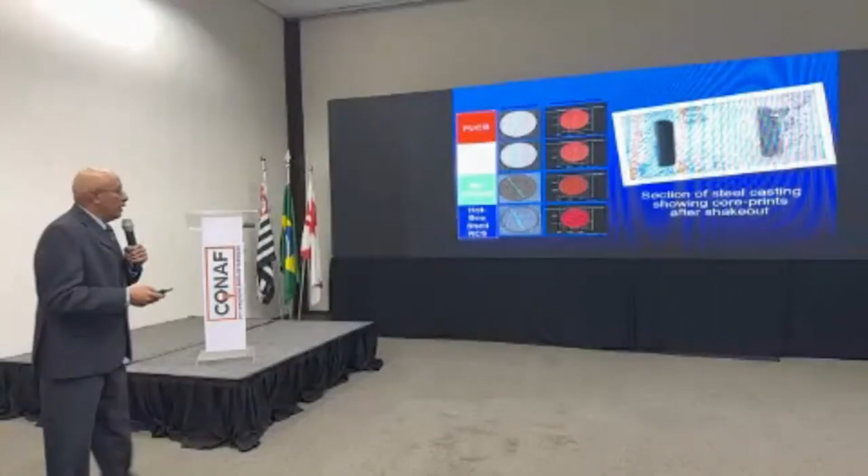So here I'm showing you a cookie in the donut that shook out, and one that didn't. We have this evidence - we can qualify, as I mentioned, whether the systems are urethane cold box, no bake, 3D printed, or hot box. We can do that. This is the macroscope that I spoke of.

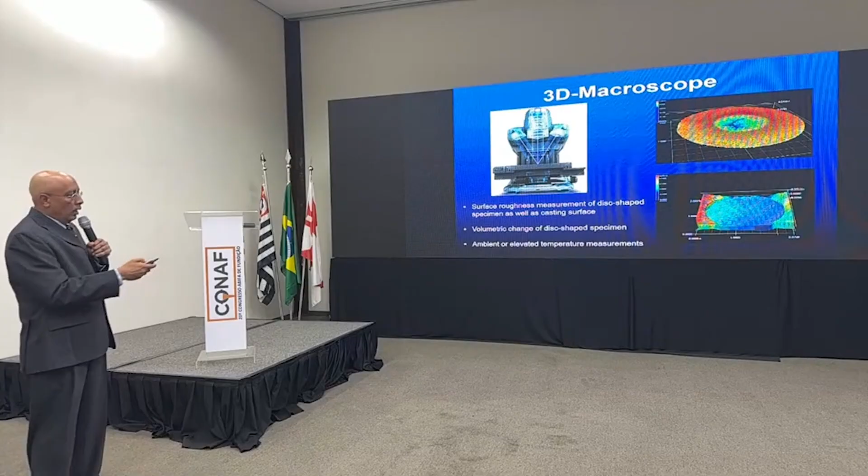This is a non-contact instrument that gives us the surface roughness and the volumetric changes for losses. We can do this measurement at room temperature for the cookie, or at elevated temperature for the castings, where we could see a defect like a vein or penetration vein, etc. So when we have the data from the lab test: impact strength, retained strength, abrasion, thermal distortion, etc., we also have the mold-metal interface or the cookie-metal interface represented here.

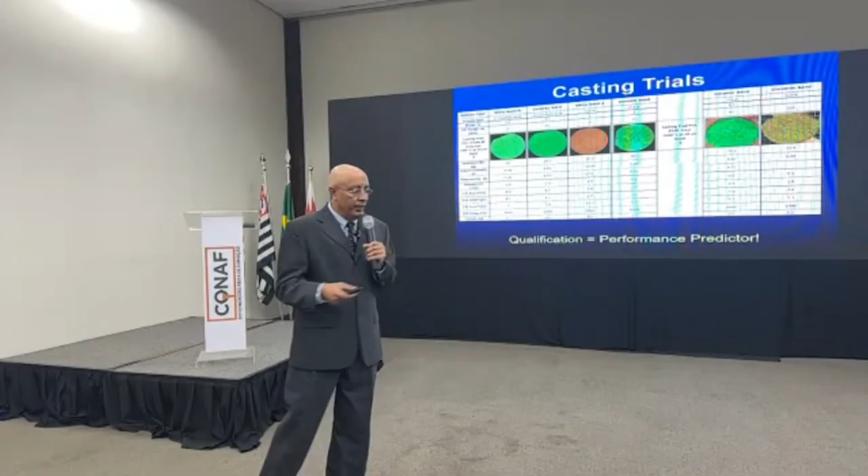But now I do want to show you some results relative to this qualification performance predictor of silica sand versus Castball in such an experiment. So the typical properties of the sand I'm using, in this particular case the silica sand, has high levels of silicon dioxide. I don't know if your silica levels are this high even in Brazil, this is probably some of the best that we have in the US. But the ceramic sand, Castballs from Brazil, high corundum materials, are shown and depicted here.

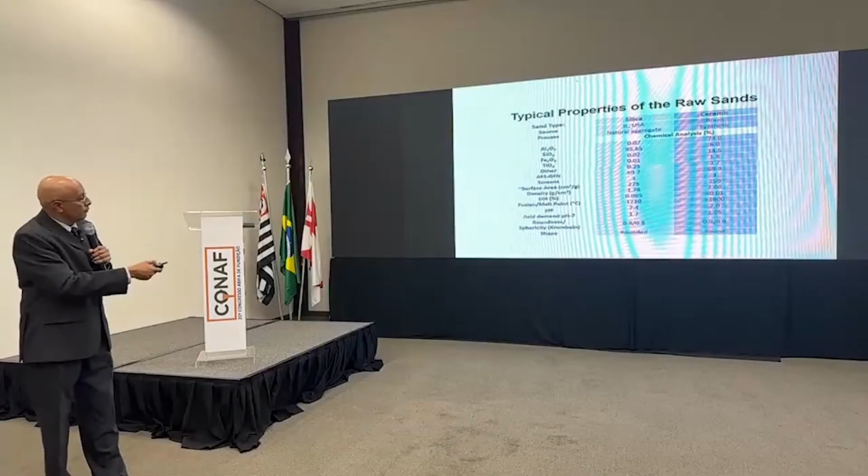Okay, now I have collected the data on the surface roughness. The silica sand urethane cold box, silica sand urethane cold box cast balls, silica sand round grain, shell, cast balls, shell, 3D printed silica sand, cast balls 3D printed. All the same GFN size, distribution, surface area about the same.

But after these cores were made, we track the surface roughness. So we measure. As I mentioned to you, when metal touches the surface it should get better, meaning we get a lower number. If the number goes higher, we know we have a mold-metal interfacial reaction. So look at what is happening.

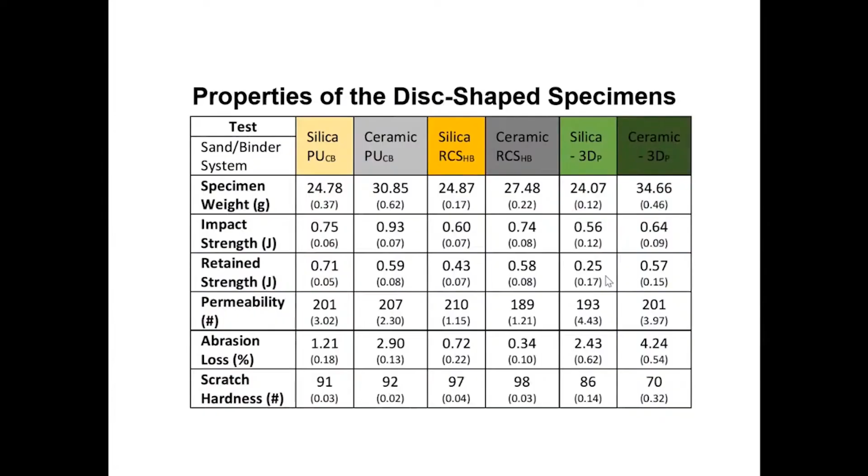We perform these tests that I showed you before. We have the data, I can share this data, or the Curimbaba group, Mr. Peter, can share all this data we have given him to save us some time. We have run the thermal distortion test like I showed you before, and we got all the laboratory data here in the silica sand, the ceramic sand, you see what's happening. But again, the foundry engineers, they like to see what is happening on a casting trial.

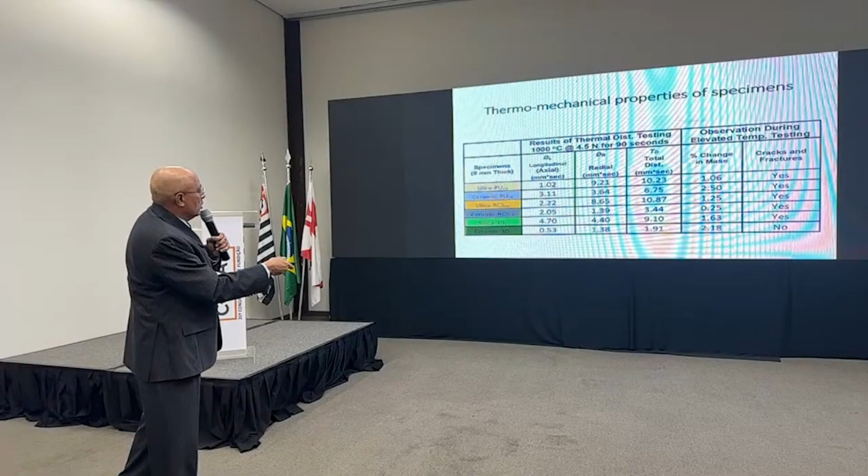So again, from the thermal distortion test, I'm pointing: silica, silica, silica, cast balls, cast balls, cast balls. Look at the thermal distortion, it's all reduced, significantly lower, radially or axially. There is literally less loss relative to certain systems, but in overall distortion, the ceramic cast balls is better.

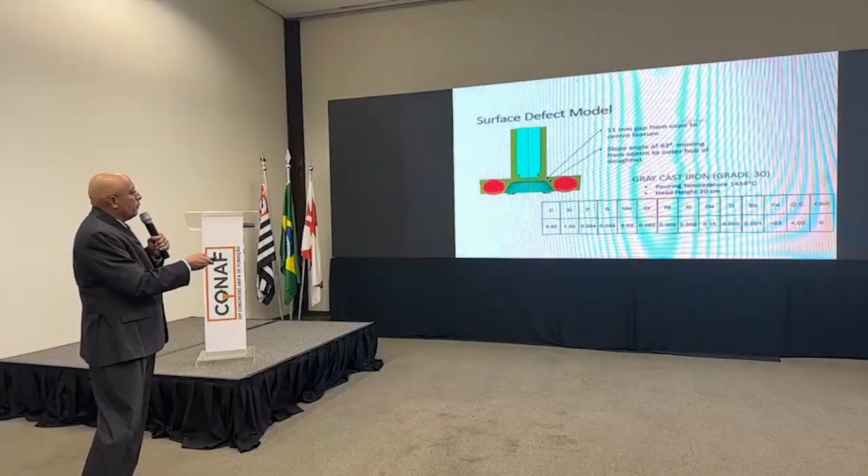But what about the casting trials? That's the qualification. The issue here, we put the cookies in the donut. In this case, we poured a grade 30 iron, at a pouring temperature of 1434, from 20 centimeter head pressure. Again, to show you the model, just in case you were sleeping the first time, right?

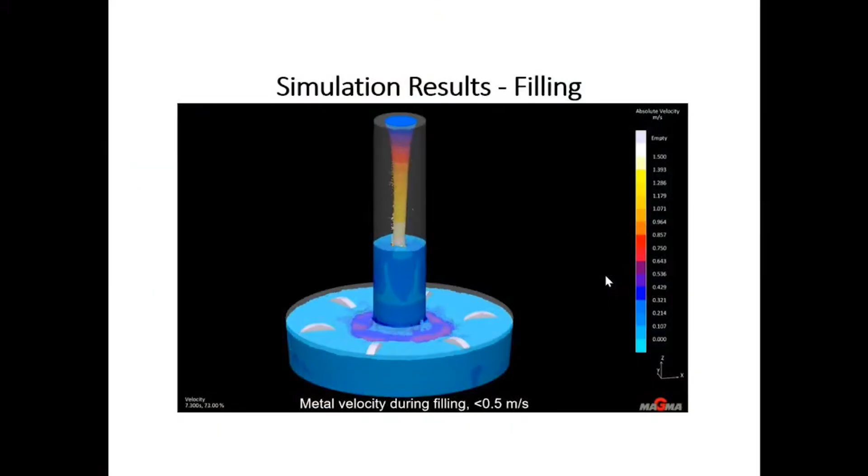This is the idea, but there is some important information I want to show from the simulation. I want to show where the hotspot is on the cookie. This time, I want you to observe this information. So the solid fractions, as we run this, is going to be right here. Right here it's 2 o'clock, but on the back side it's 10 o'clock. Please remember those locations, right?

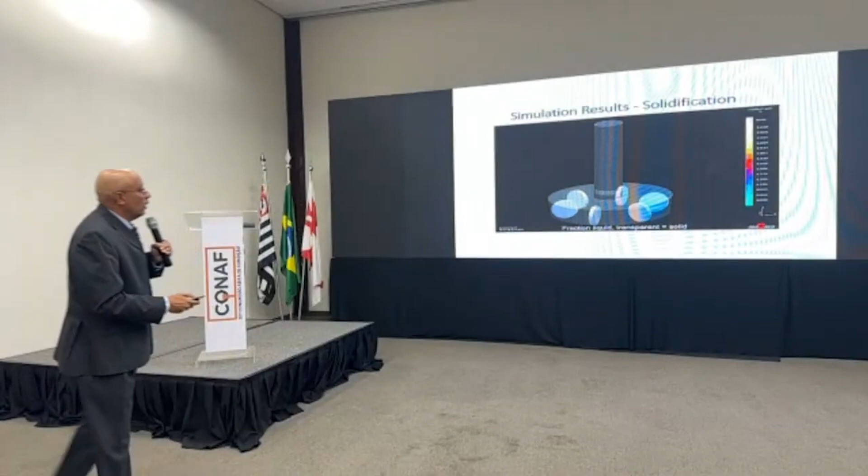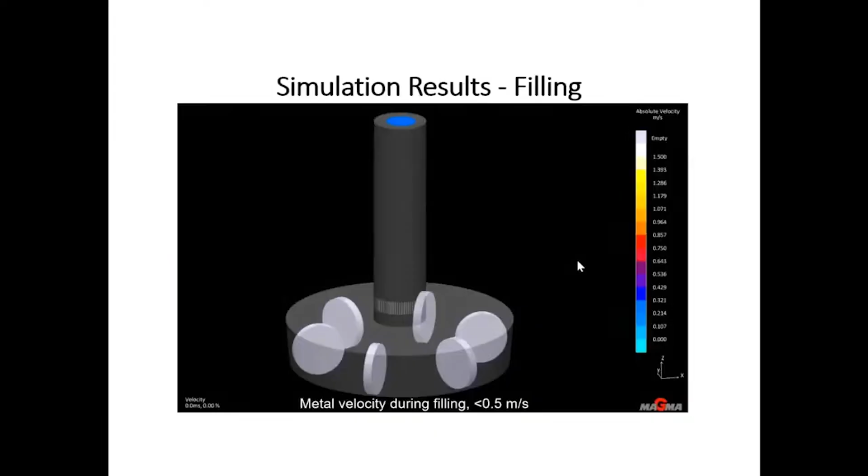And again, this is poured in a very quiescent fashion. Let me go back here and play this again. Here are the velocities. Can't get it, let me see if I go back. Forward, yeah it doesn't show. But please believe me, I will show you the data. We are less than 0.5 meters per second, so very quiescent filling, very slow, no turbulence for this iron condition.

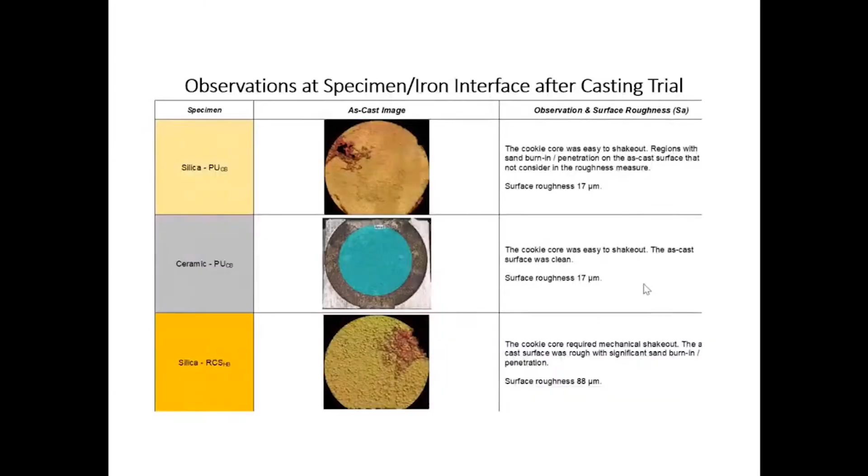The hotspot, as I reminded you, is 2 o'clock and 10 o'clock. So let's look at the casting. Here is silica sand, defect at 10 o'clock. No defect, look at the surface roughness, same. I don't measure this, I'm only measuring the surface roughness right there, right at this 35 millimeter diameter blue spot. But silica sand, defect at 2 o'clock, right where the hotspot is.

The reason I'm pointing this out specifically is this is a penetration, we know this is not erosion. That's why I'm telling you it's a 2 o'clock, 10 o'clock defect. But more specifically, our surface roughness values for the ceramic sands went down, meaning no mold-metal interaction, the smoothness is superior on those castings.

And in a nutshell, that's what I wanted to show you. I'd be happy to take your questions.